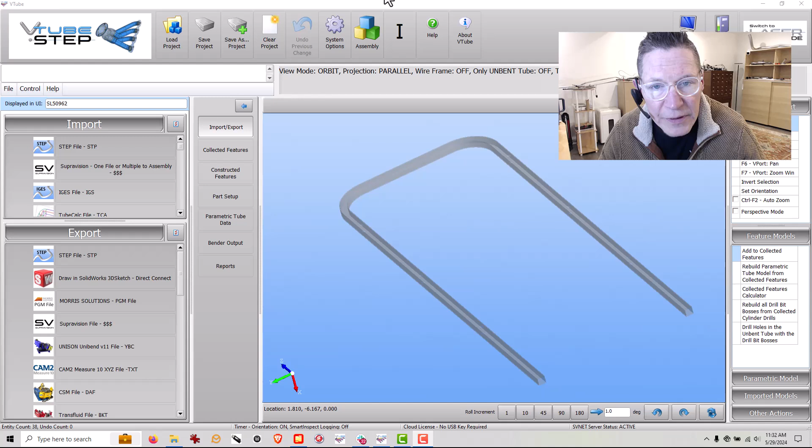Hi, in this video for VTube-STEP, I'm Michael Cohn, and I'm going to show how it is possible now to import a square part that has no fillets in the corners or corner fillets. And so I'm also going to, in this video, clock some of the holes.

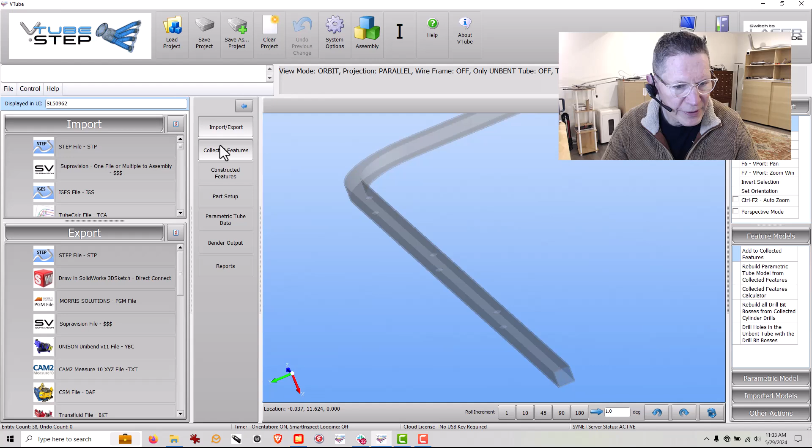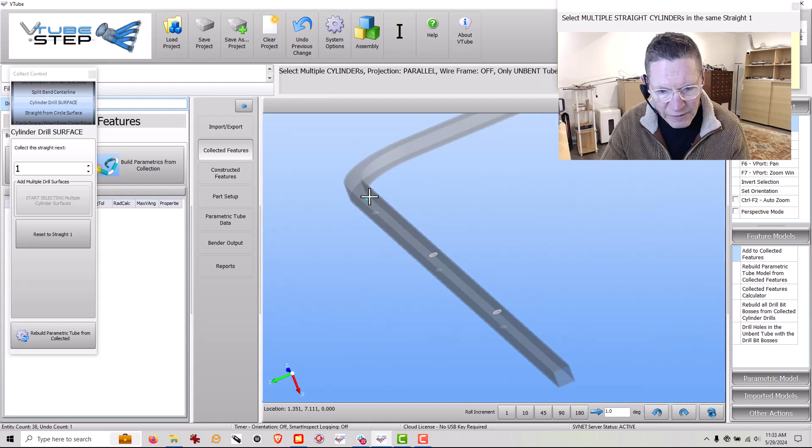So the first thing I'm going to do is I'm going to go to Collect Control, and we're going to move down to Cylinder Drill Surface like this. And we're going to make this straight one. And I'm going to go ahead and select a few holes. So there's one hole, pushing the shift button. Here's another hole. And the shift button is still down. Okay, I want to hit right click.

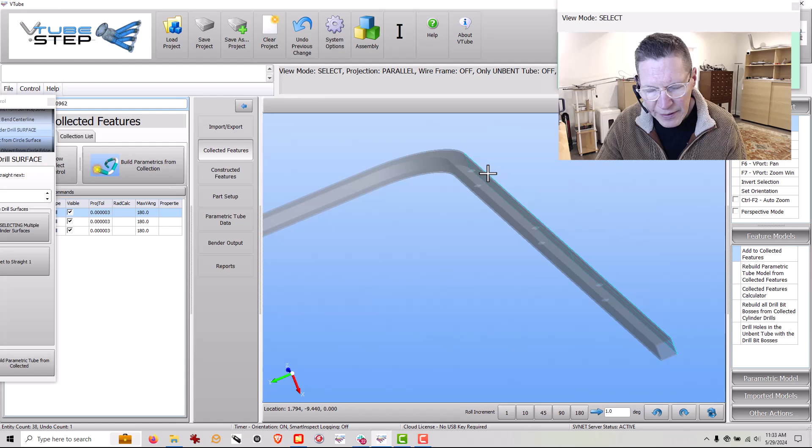Now I've just selected 3 cylinder drill surfaces. So there's cylinder drills here in the EntType, okay? Now that's straight 1. Let's go over to straight 2 now. Actually straight 3, because this is straight 2 right here. And I'm going to go ahead and select 3 more. And so now I have a total of 6 cylinder drill surfaces collected.

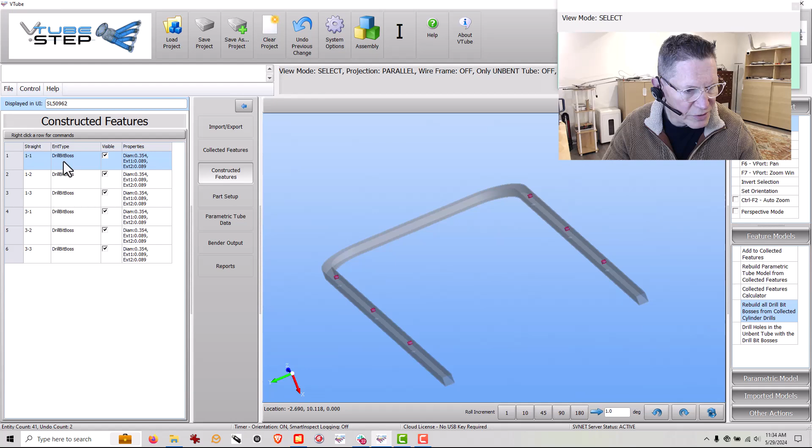I'm going to rebuild the drill bit bosses. And when you do that, what happens here is you've got constructed features built called drill bit bosses, okay? And they show up this way. And they are separate from the surfaces that were collected.

And the goal here is to allow for drilling in an unbent model, for example, if you want, or drilling with these holes where you can subtract solid from the main parametric part after unbending. But in this case, we don't need to unbend it. What we need to do is just clock these holes relative to each other, literally get the distances of each of these holes from the end and the distances from the tangent points.

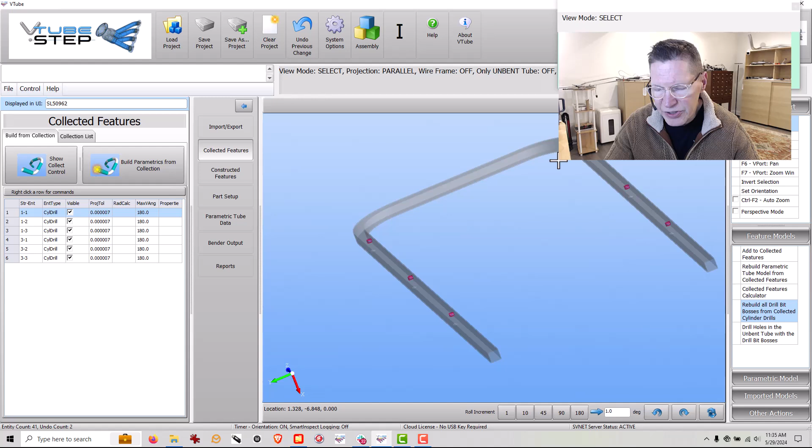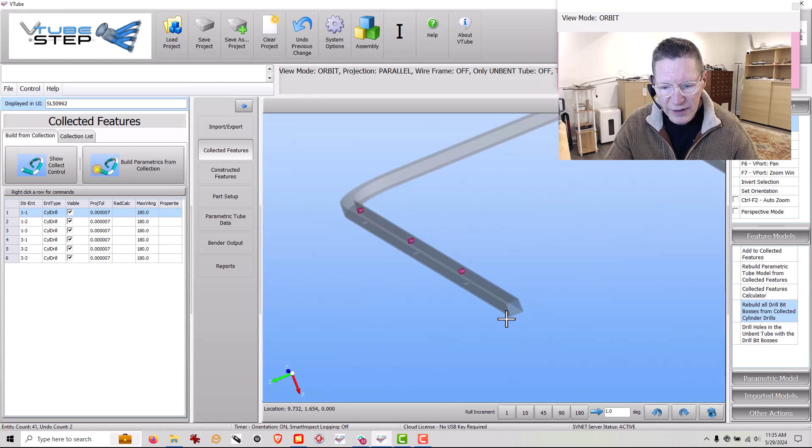So let's go ahead and now find the center line of this part. And this is what's a little bit different in this version. This is version 4.3 build 1582, which has the ability of finding the center of a square with no fillets by selecting what's called straight from line.

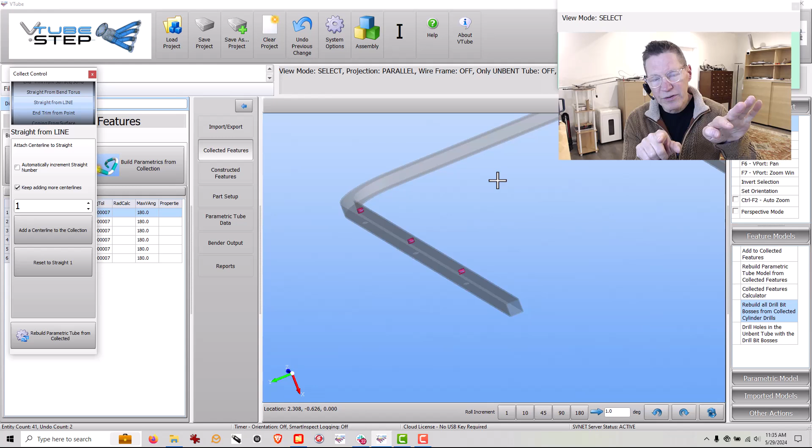Okay, now the straight from line collect control was designed so that you could choose a line entity that was already a centerline. But now with this version, you can select, for example, 2 different lines that oppose each other and find an average. And that's what we're going to do here. That's something that's new as of this build.

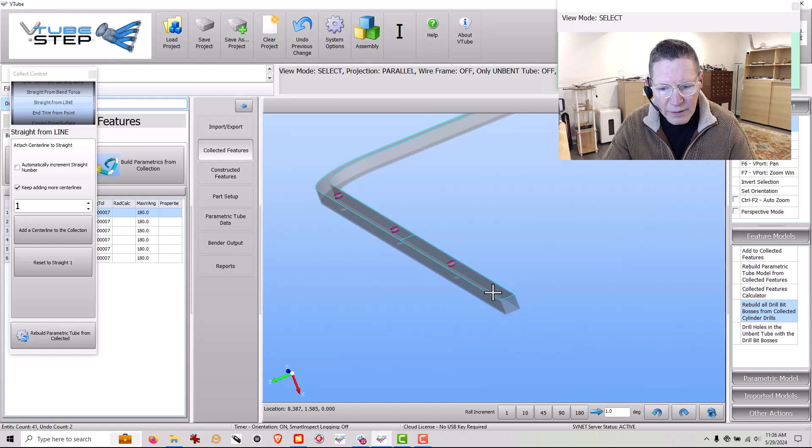In order to do that, though, I need to get to a line. And the line needs to be the intersection of these planes. Okay? You can use the same principle if you were importing what's called a corner profile. If you have this kind of situation with no fillet in the corner, then you can get to that corner line. Now, right now I can't select a line, so what I'm going to do is go into select mode.

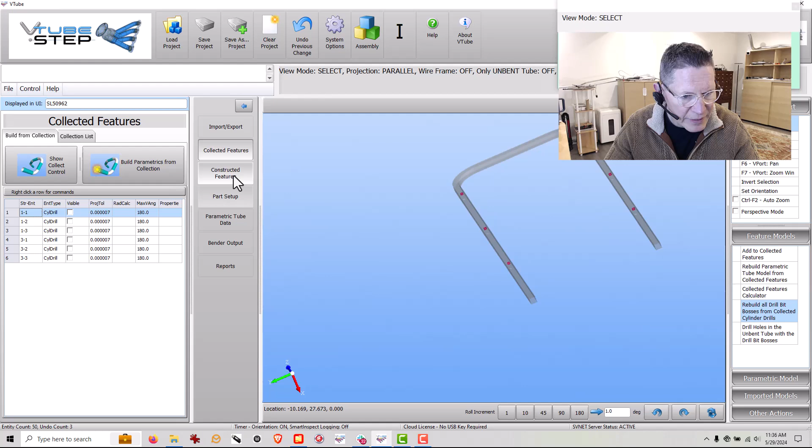I'm going to try to get to the lines by performing an explode on this particular part. So let me just do this first. Turn all of these collecteds off, because I don't want to do any work on those. I don't want to have any impact. In fact, I'll select the whole thing. And I'm going to go to imported model options. And I'm going to explode.

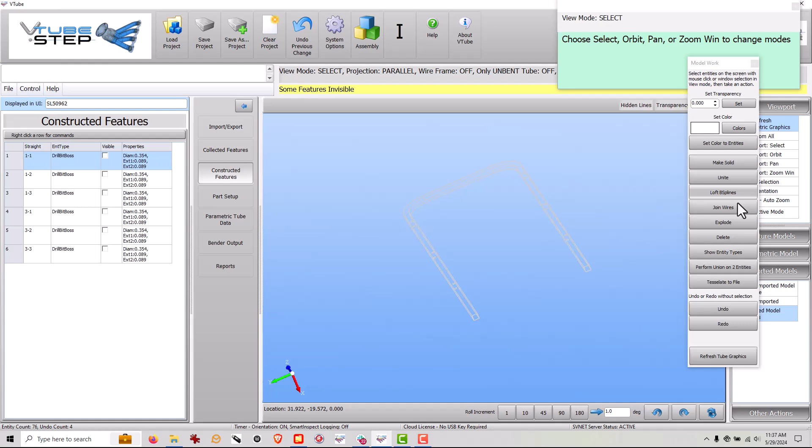Now, at this point, I want to hover over this to see if I can get to a line. And the answer is no, you can't yet. So I'm going to select it again. And I'm going to explode again. So there, I've exploded twice. And now look what I can do. I can get to the lines. Now, in order to see this model more clearly, I'm going to change the color to something that's easier to see, like black.

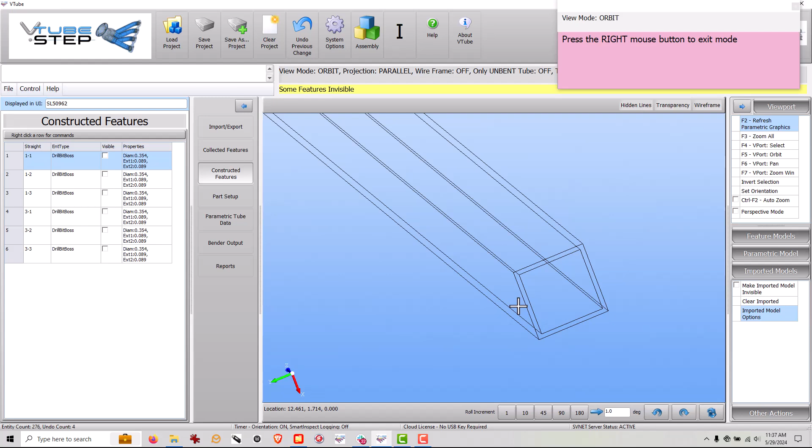Okay, I'm finished with the model work control, so I'm going to close that, and I'm going to zoom in down here at the end of this part. I'm going to go back to collected features. I'm going to show the collect control, and make sure that it says straight from line. And then I'm going to say, yeah, keep adding more center lines, but don't automatically increment the straight number, not in this situation, because I'm going to be selecting 2 lines per straight. So I'm going to find a corner that I want.

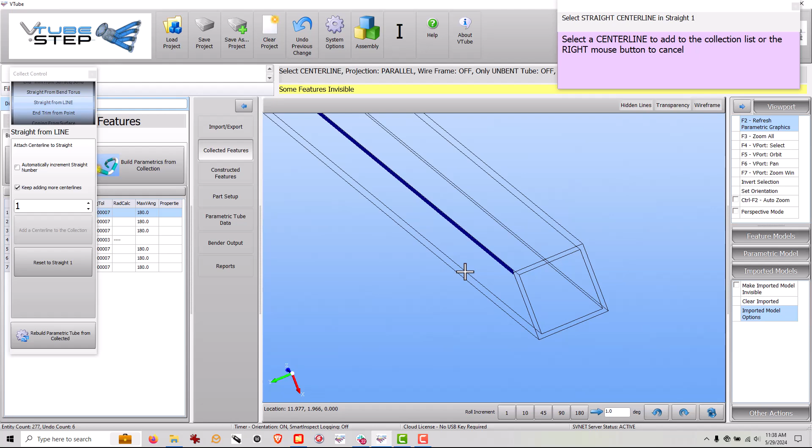I'm going to hover over it and left click on it. Now because this checkbox was checked on, it's going to ask me to find another one. So I'm going to go to the outside corners that oppose each other, and that's all I need, and that's straight.

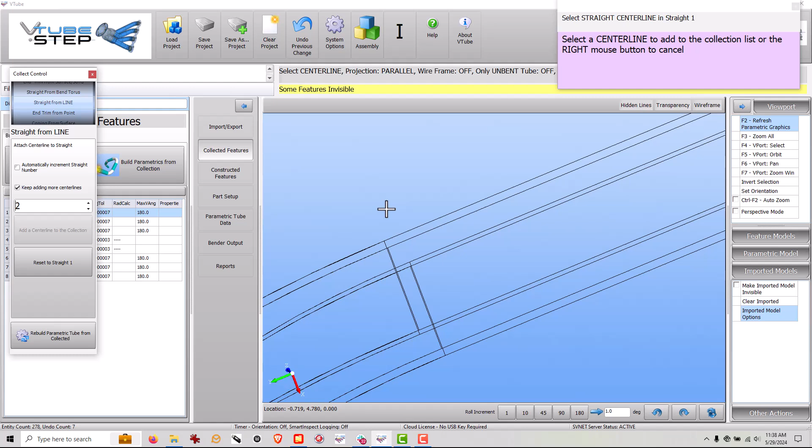So let's go to straight number 2 now, and I'm going to change this to 2. If it's not clear what you're selecting here, just right click to get out of this mode, push the mouse wheel down, and orbit around a bit.

Now I can see exactly what I need to select in order to make this work. So here's what I'm going to do: I'm going to make this one of my lines and this the opposing line on the outside for straight 2. So let's go to straight 3 and do the same thing. Good, now we have enough information to find the center line of this part.

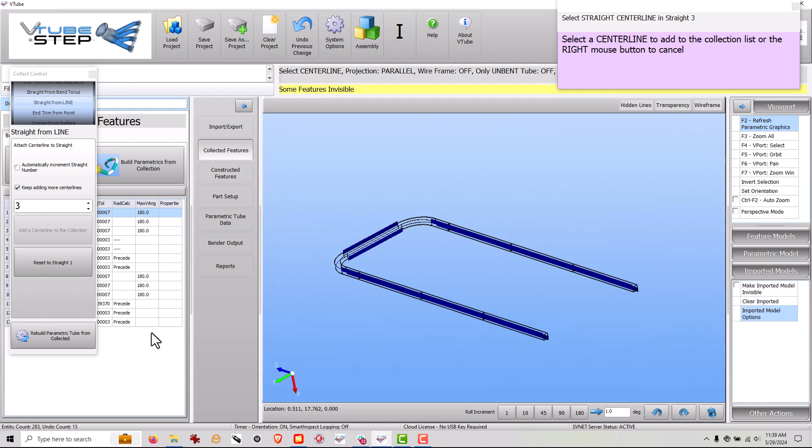So what I need to do now is rebuild the parametrics like this. Now you can see that we have the center line of this part, and using this mode it won't figure out the diameter of the rectangular piece automatically, but that's not of great significance.

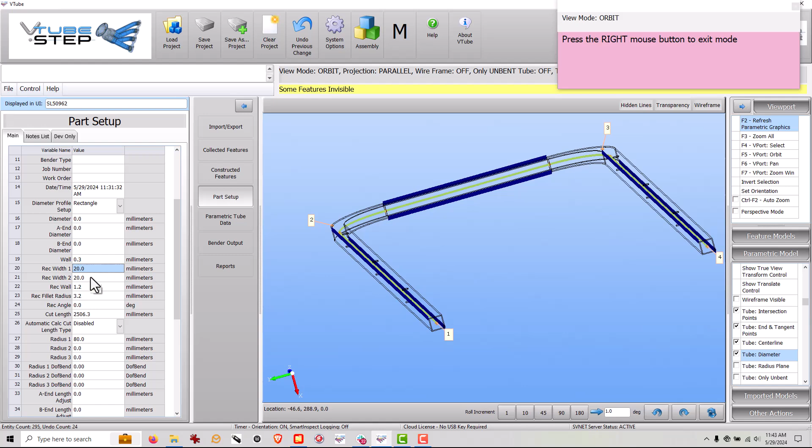We'll go ahead and go into part setup, and we'll change this over to rectangle for the diameter profile setup. Then down here, we're going to experiment with the widths. I know this happens to be a 20 by 20 millimeter rectangular piece, so it's square really.

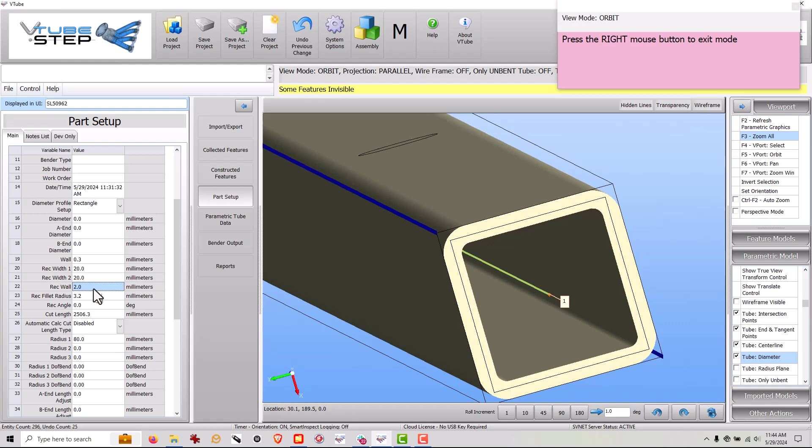Then you can set your rectangular wall. You can zoom in like this and make sure that the wall matches up. You basically set it like this. So let me just make my rectangular wall too thick, and you'll say, oh look, it's too thick. And so then you can match it up. Just keep changing the values and then hit F2 until it matches up.

So I'm just going to look down through the entire part, and you can see that we really do follow the profile of this part very well. Now I'm going to press F3, and this part is now set up for the master.

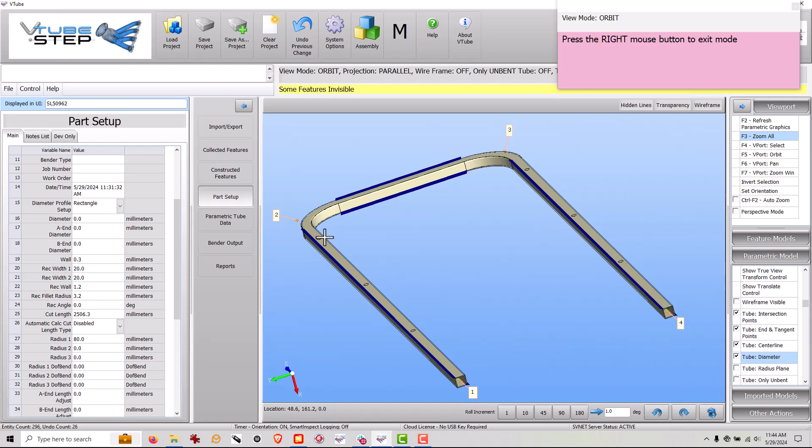You can go into VTube Laser and measure it. But before we do that, I'm going to go into constructed features, and we're going to turn all of these on. And you're going to see these drill bit bosses here.

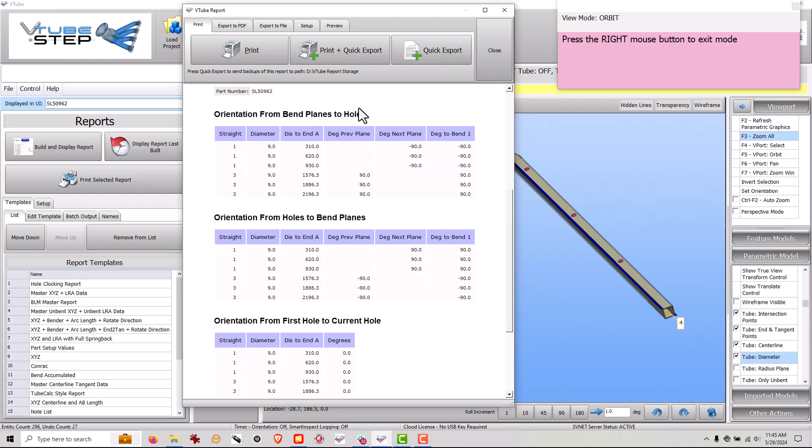Now at this point, you could go into reports, and look at the hole clocking report, which is a new report template inside this build, and you can see all of the angles and the distances. So an example here would be from end A, if you wanted to put the holes in before you bend the part, you've got 310 millimeters from here to there, and then 620 from here to there, etc. You've got all this information to use to actually drill this part when it's straight.

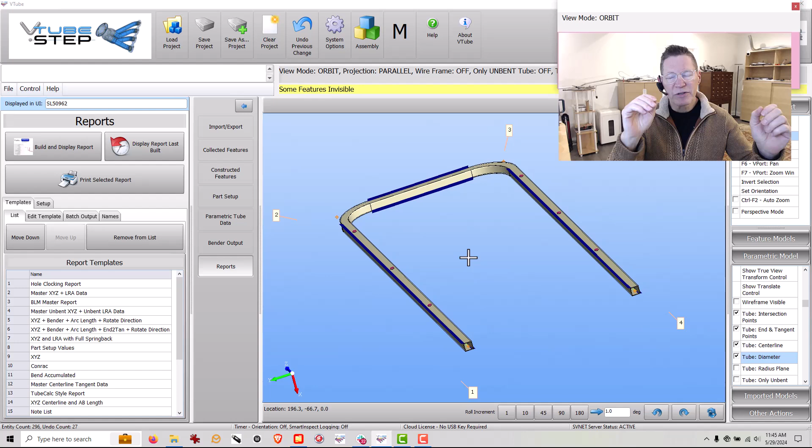So let's just say that you do an experiment and you find out that this particular tube material in this setup elongates by, let's just say, 15%. So when you do that, it's going to completely change the report and the hole clocking report, the distances.

So you're going to see the first straight's not going to change because there's no elongation before the first straight. But see this 1538.6? That's changed. So just keep that number in mind. Let me go back into part setup.

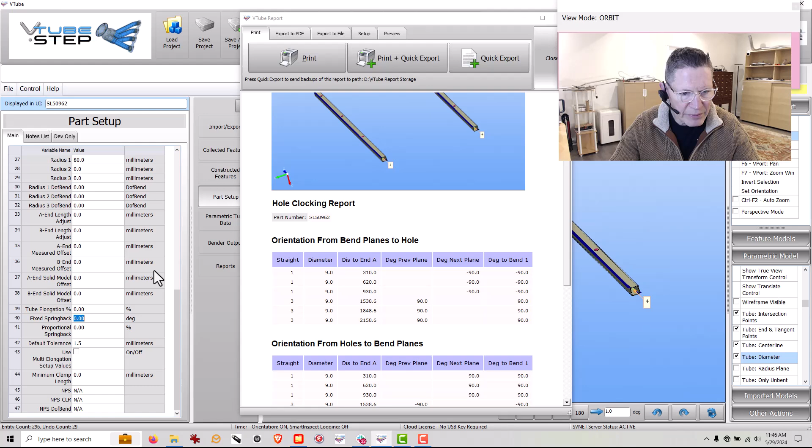1538.6, we're going to set this to 0. And then we're going to go ahead and go to reports and rebuild this. And now that number is 1576. So you can see there was definitely some elongation that pushed the distances for these 3 holes in this straight.

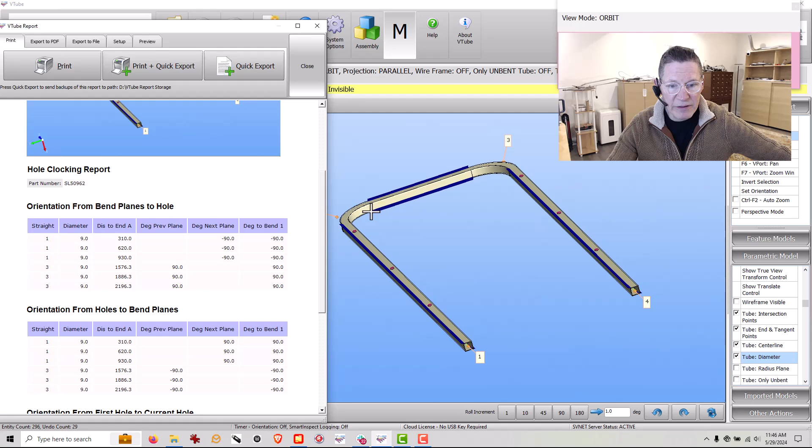Closer to the end of the tube, because it's trying to anticipate elongation, which is really important if you're going to be putting the holes in before you bend this part.